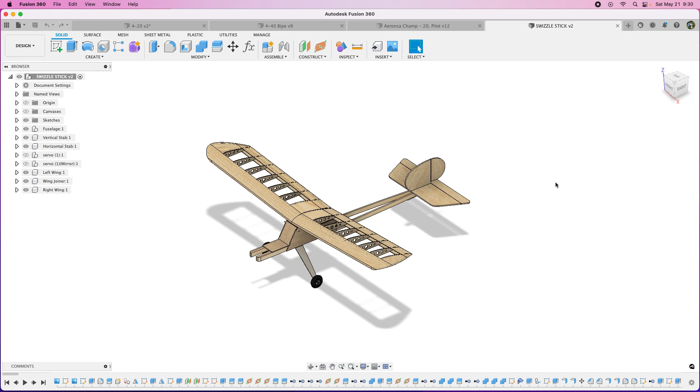I don't know if y'all are familiar, but Balsa USA makes that Stick Plus, and this is based off their plan, which was a Swizzle Stick way back in the 70s. Like the Stick Plus, it's a great flying airplane, but I redrew it. This is the 25-30 size, and I put aluminum gear on it versus the plans called for wire gear. I use a company called SendCutSend to cut my aluminum parts, and they do a fantastic job and are very reasonably priced.

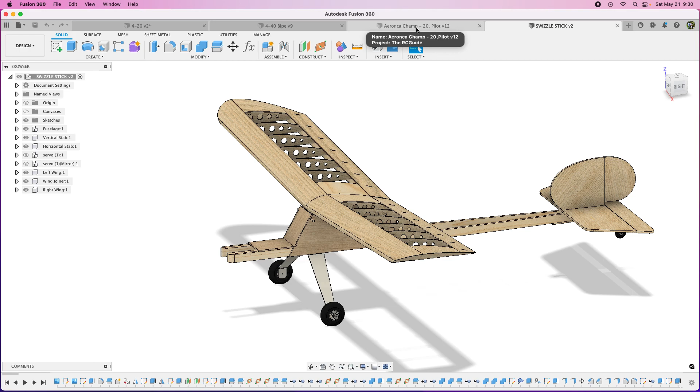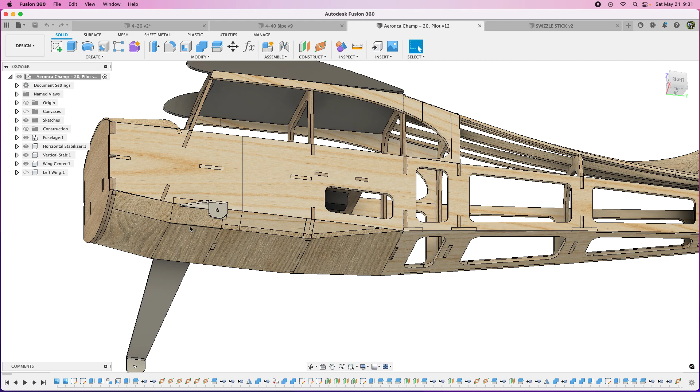This is a Pilot Champ that I've been working on, and this one's been a challenge. A lot of challenges here to overcome, and part of this was I wanted to make a hatch down here to put the battery in, and so that was tricky. And I think these two little spots here, parts here, are going to end up being solid balsa.

We did the stringers here. I'll have a video on that coming out soon. These stringers are not nearly as difficult as you think, and they're easy to do, and of course stringers have a great effect and help you build a lighter structure.

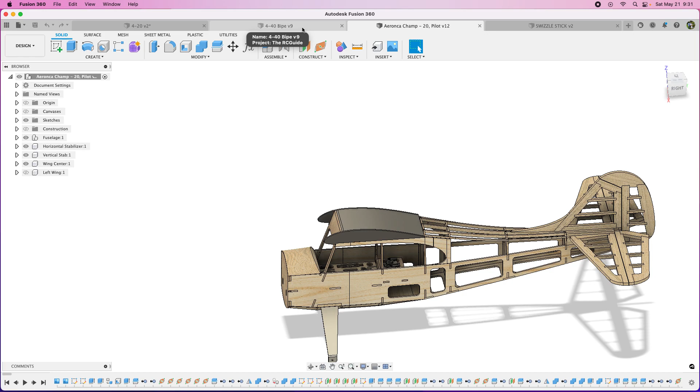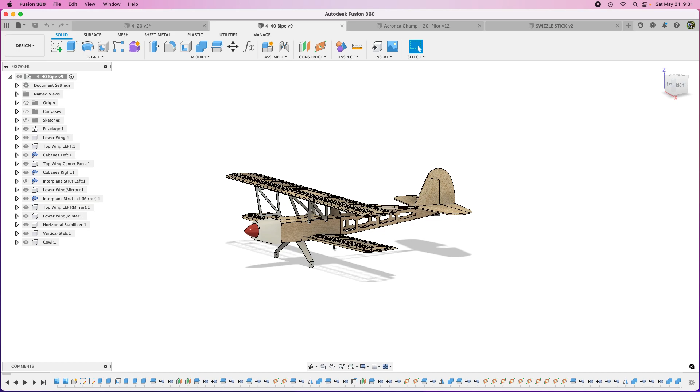This is based off of the Doc Mathews plan 4-40 Bipe, but it was kitted by Ace, and it's very similar to the SIG planes. They don't have the biplane, theirs are more like the Bingo, but still very close. I changed the tail a little bit, I added some rudder. I like to try to fly knife edge when I can, and I took all the dihedral out of the top wing and put less dihedral in the lower wing to help with that.

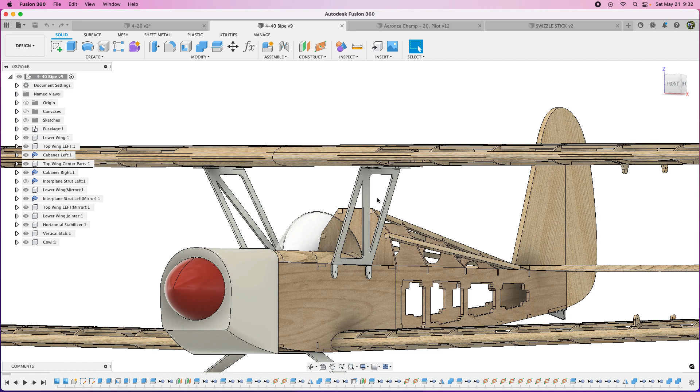The plans originally called for wire cabanes. I drew these in aluminum, and again, I'll send these to SendCutSend, and I'll probably order them out of 5052 because I have interplane struts as well. These will be strong enough, and the 5052 they can bend at SendCutSend. The landing gear I do out of 6061 T6.

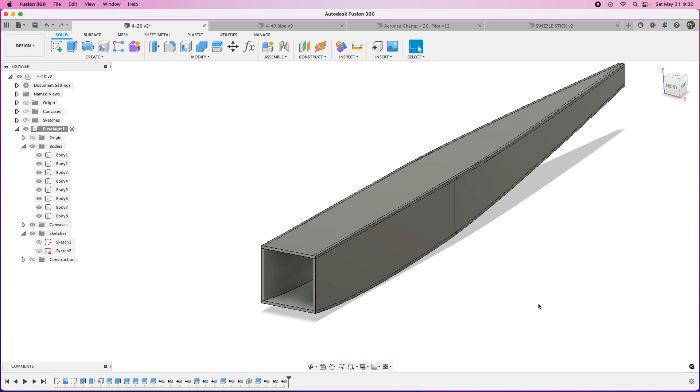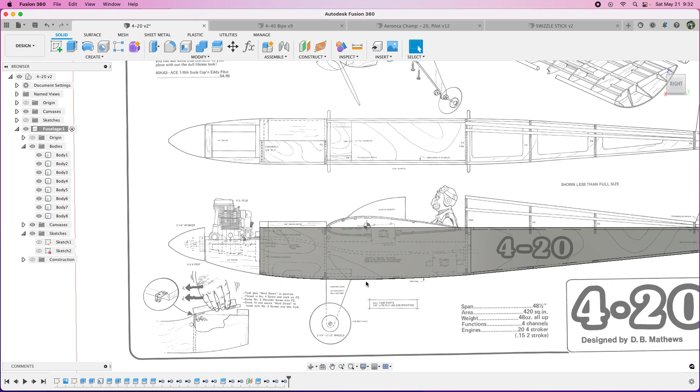Then on this is an Ace 4-40 or 4-20 kit, which is again kind of like the Bingo, but this one had a shoulder wing. It was made for a 20 four stroke, of course I'll probably fly with a 20 or 15 to 22 stroke easy. But I'm going to show how I do landing gear on here. And that way, if anybody wants it, it's hard to find landing gear anyway, but SendCutSend is reasonably priced. And if you send them a lot of projects, it's even better because the price will go down.

All right, I need a sip of the coffee this morning.

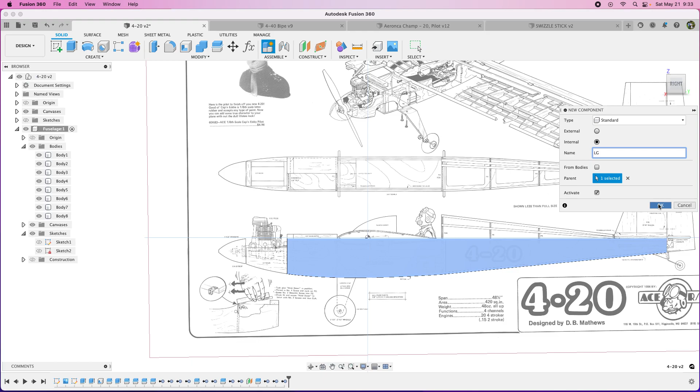So I'm going to go ahead and create a new component here. Normally I do the landing gear way after the phase where I'm at now, but I got up this morning and I said, I think I'm going to make a landing gear video, or at least an aluminum part video. But we're going to call this landing gear or undercarriage for you people in the rest of the world. Yeah, for some reason the US, we call everything and do everything different, and I don't know why.

Okay, so we created a new component for this. I don't know if I have a, yeah, there we go. Nope, not that one. Okay.

One of the things, a quick note about landing gear: if you're doing your own design and you don't know where the landing gear placement should be, it is important depending on the type of gear. So if you look at this, the axle is about at the leading edge on the tail dragger, or conventional gear. If you put it too far forward, it's going to take longer to get off the ground, and it may just hop. Then for tricycle gear, it really doesn't matter where the nose gear is, but it is important where the center of the wheels are on the main gear, and that should be 15 degrees off from the center of gravity.

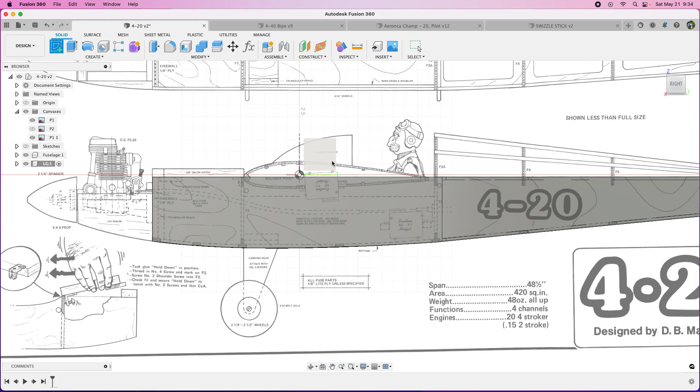So like in this instance, I'll go ahead and just create a little sketch, and I'll show about where it should be. And if we go at the same height that we have here. Of course, the height of your gear is all predicated on what props you're using. You want to make sure you have good ground clearance.

An inch or two is better, or for those using metric, 2.5 to 5 centimeters, or 25 to 50 millimeters. So if I draw a line from here to my center, this should be about 15 degrees back.

So if we go to 90, then we're going to go to 105, which is adding 15 degrees, so about right there. That's where the center of your axle should be on a tricycle gear airplane, right in this spot.

That's a general rule and it does work well. It's far enough back off the center of gravity that you're able to rotate on your takeoff easily. If you go too far back, it's going to take longer to rotate. If you go too far forward, it's going to rotate too soon, and rotating too soon is worse than rotating late. But anyway, you want to avoid that.

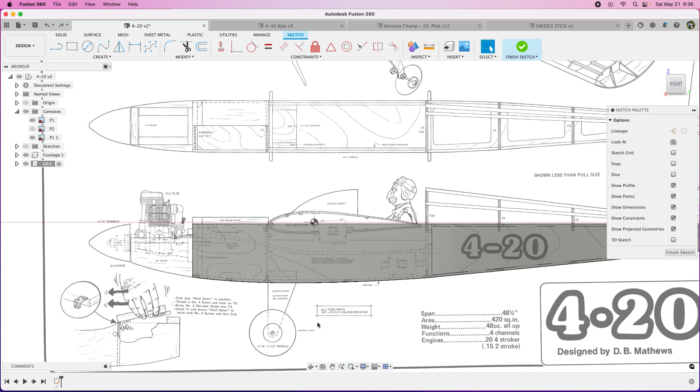Okay, so that's just a quick idea about landing gear placement. Now what I want to do is work this in the sheet metal environment. So I'm going to go to the sheet metal environment, and the first part I make is not in sheet metal.

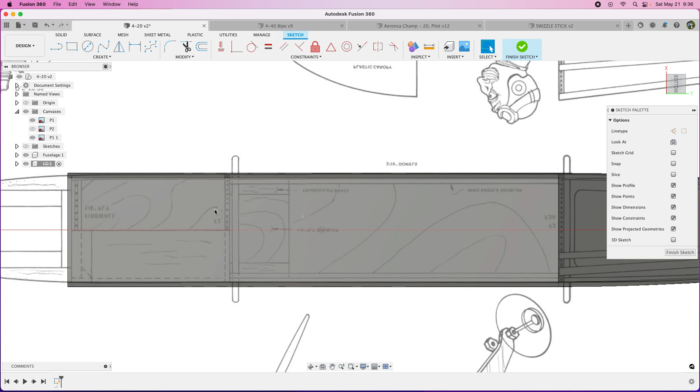So we're going to create a sketch and end up converting it to sheet metal because it's easier to control the thickness. Let's draw a center line here. We're going to make this a construction line just to help us stay located. I'm going to turn that one off for now.

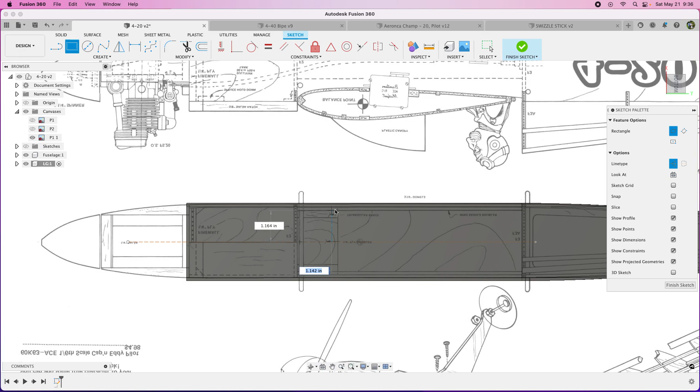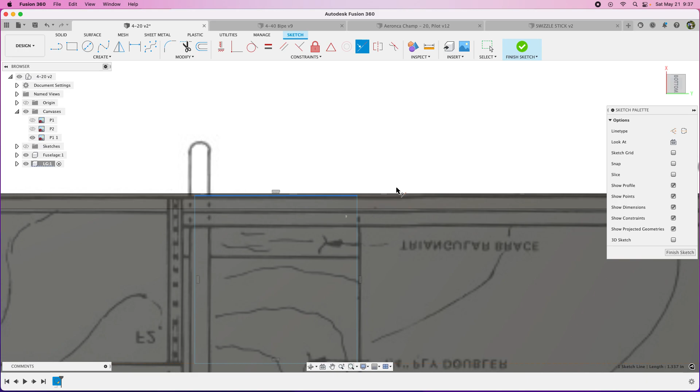This is where the landing gear block is, and I'm not 100% sure of the width, but I only want to go on one side, and then I'm hoping to mirror it. Normally I do it on two sides, but I'm hoping I can just mirror this and combine it to make it easier, with fewer steps. So I'm going to put this in line with that line on the fuselage.

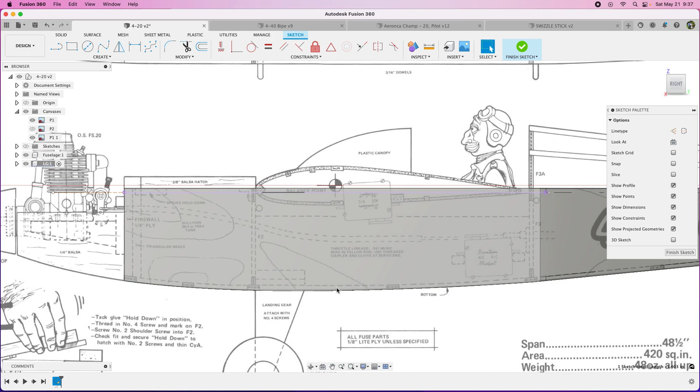Let's look at the side drawing really quick and get this width. Oh, I'm way up there. That's all right. Let's put this—I just want to get that close, and you can make all your adjustments however you want it.

I'm going to do an offset. Since I'm way up here, I'm going to do an offset extrude. That looks pretty close.

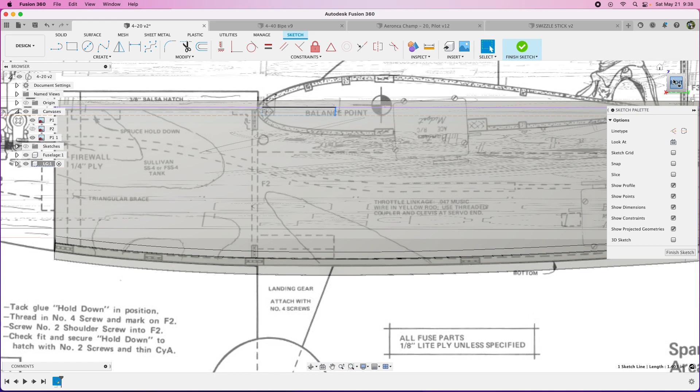Okay, so that's really all I need on this sketch. Let me go back real quick—you really got to define these sketches. So let's put a dimension there, and then we'll put a dimension here, and that should lock all this in place.

For some reason it didn't. That should be the same, right? Yeah, that is. That should be the same.

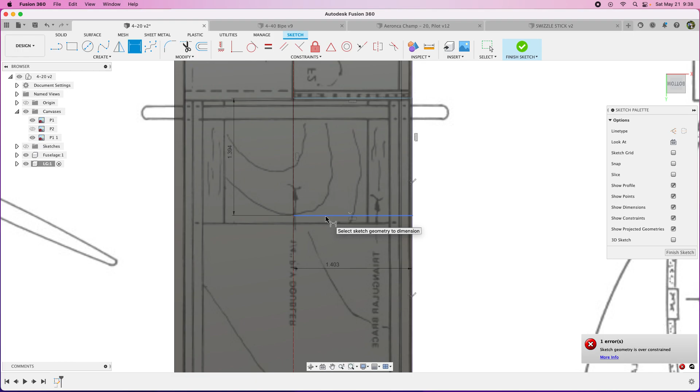Okay, let's find our origin, and then we'll make a measurement from the origin. There we go, now it knows where we are. Okay, so I'll finish this sketch, and let's hit the home button here.

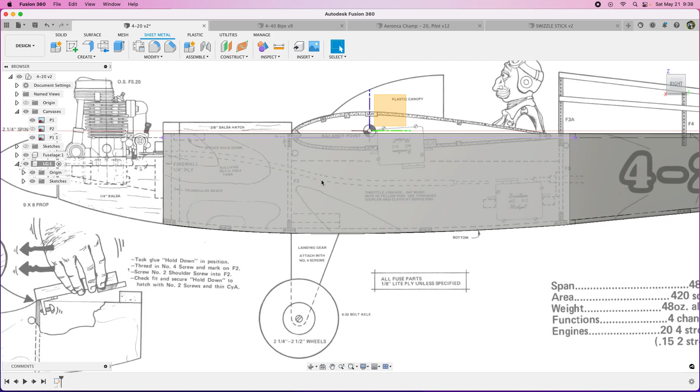What I want to do is make this the thickness of the material I'm going to use, and I'm going to use 1/16 inch 6061 T6. Let me turn the canvases off for now, and I'm going to turn this fuselage off for now. And I'll make sure I get that.

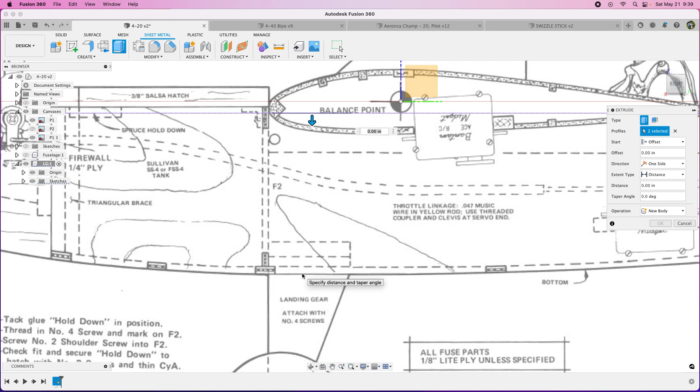And then let's turn these canvases on, and we want to do an offset. So we're going to do this offset, and it wants to know how far—we can do it to an object, which in this case would be easy, but I may not be able to select the object.

Okay, now we want to go down 1/16. Cannot extrude the object—extrusion failed. I don't know what's going on there. Let's see here.

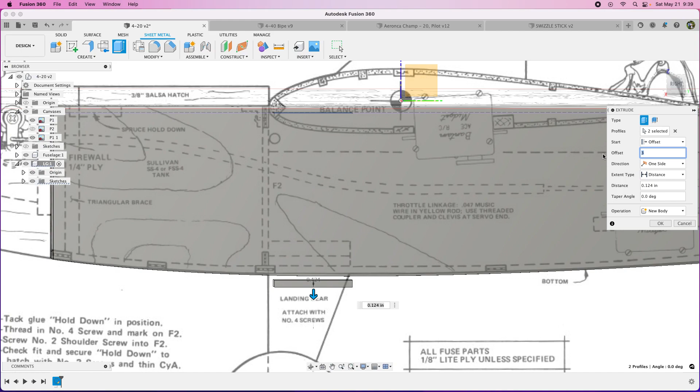I'm going to do a distance. I'm going to guess it's 3 inches, and we can adjust this. I should have measured this before, but that's all right. 2.9... 2.95... all right, that's 2.93. There we go, that's pretty close.

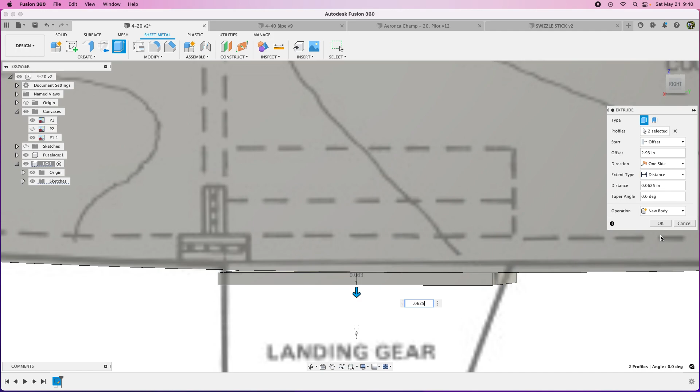And then we want the distance to be a 16th, so 0.0625, or 1.5 millimeters, or 1.6 millimeters to be closer to accurate for the rest of the world. And there we have our little base to our landing gear.

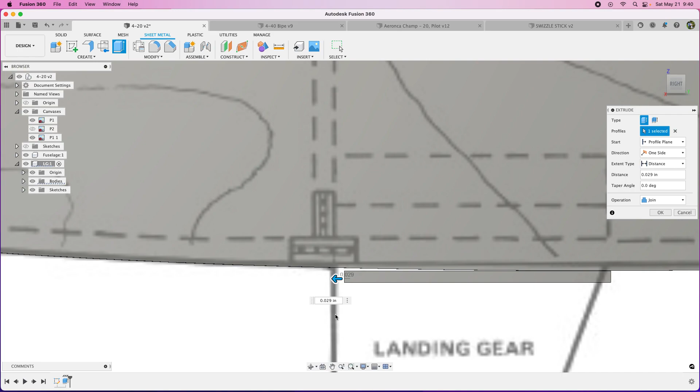It looks like it's a little short from what was on the plan, but that's fine, we can fix that. We're going to extrude this side. And of course, you can measure more accurately from the beginning, and that's fine. All right, I think that's going to work.

Okay, so now we want to convert this part. Let me change the appearance on this fuselage so it's easier to see. You can hit A for appearance, or you can right-click.

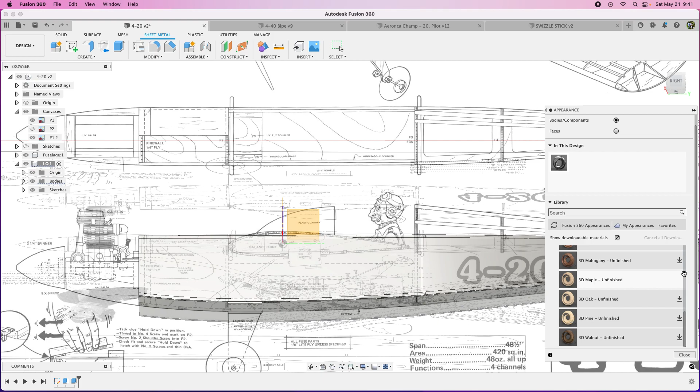Let's go here—wood solid, unfinished. And we'll download this one. That's how you download them if you don't have them already downloaded to your computer. Let me just go up here.

In case y'all were wondering how that happens, this is how you change your colors and appearances. Just so you know, you can change the appearance, but that doesn't change the actual material you're using. I'll show later in another video how to do that.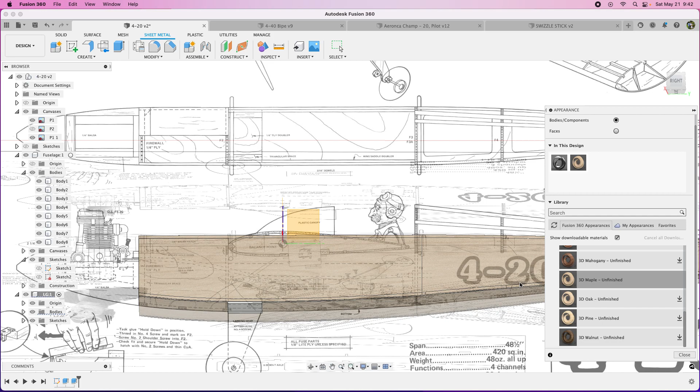I might be able to just hit... there we go, that did the whole thing. Okay, so let's close that.

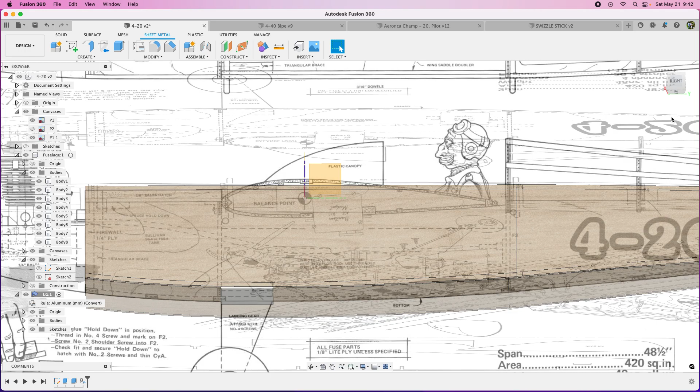Now we're going to convert this piece to sheet metal, and I'm going to change it to aluminum so it has the aluminum K factors. It says note: wall thickness will be changed to 0.063, which is what we want. And there we go. The sheet metal tools in Fusion are really nice and simple to use.

One of the things on this plan is it doesn't give me an accurate dimension of the width of the gear. So just so you know, as a reference, the landing gear width is about 25% of the wing. I'm going to run over to Chrome, and it's 48, so 12 inches is about the width.

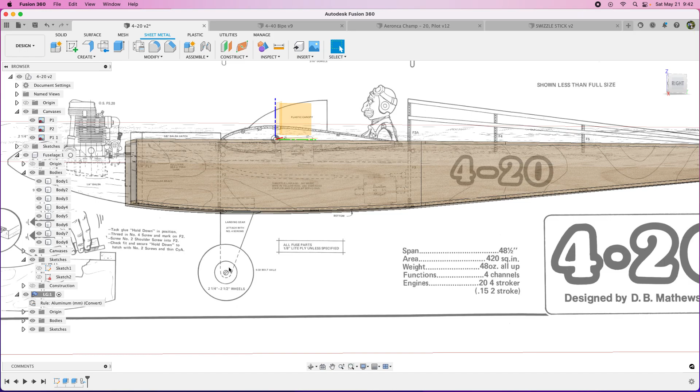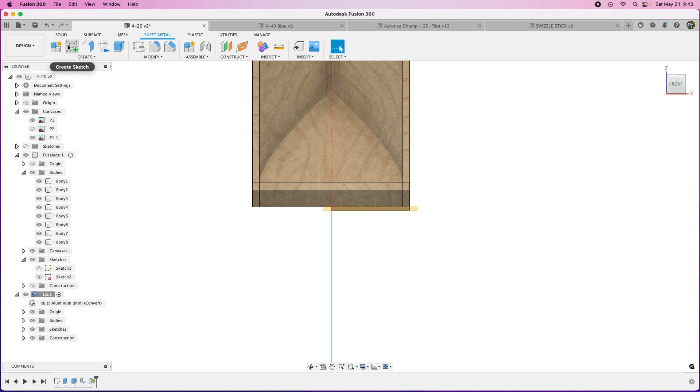What I'm going to do is make a sketch to help guide me through that. I'm going to create an offset plane—not there, on this face. And we're going to create a sketch on there. This is just going to give me some guidelines when I do my bends to help me out.

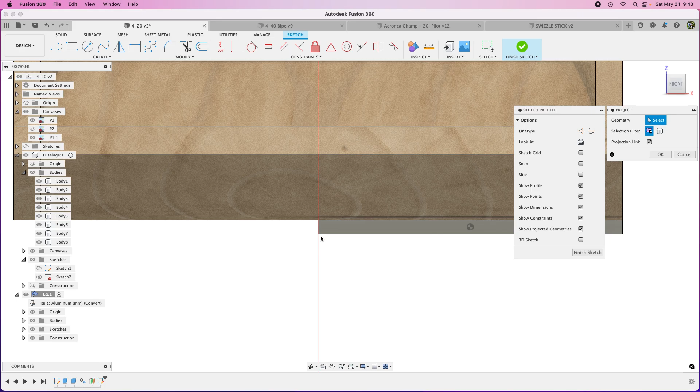I don't know why Fusion does this weird thing with moving the center. I'm not sure why it does that, but I'm just going to project this point. All we're going to do here is guidelines. I'm going to bring that down and come over here and see where the center of the axle is. It looks like it's about right there.

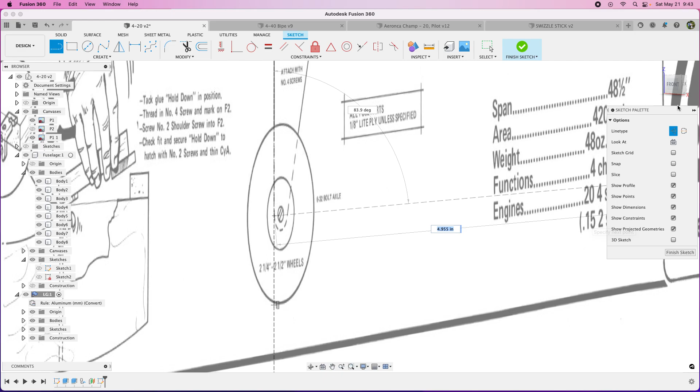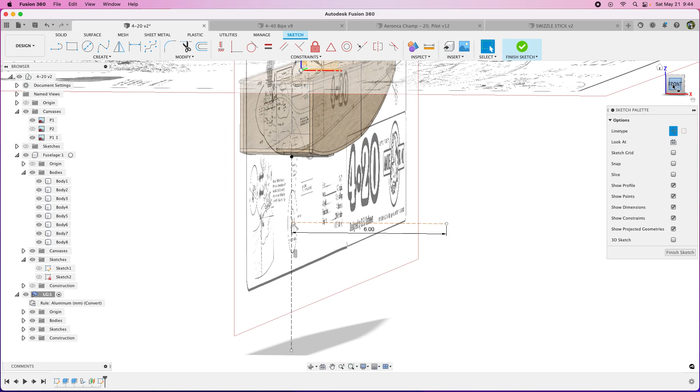We want that to be 90 degrees, and this has to be 6 inches wide. You can go one way or the other with that, but the wider stance, of course, is going to be a little more stable. But if you go too wide, it's going to be harder to turn. So finding that balance—this is where the center of my axle needs to be, and the center of my tread. So my gear should come about right here, a little far back or whatever.

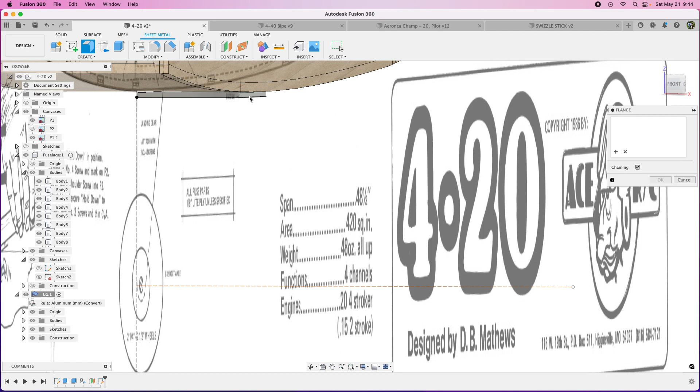All right, so that's going to be our guide. I'm going to come up here and create a flange, and I'm going to select this edge. As you see, it automatically creates the bend with the bend radius because we selected aluminum.

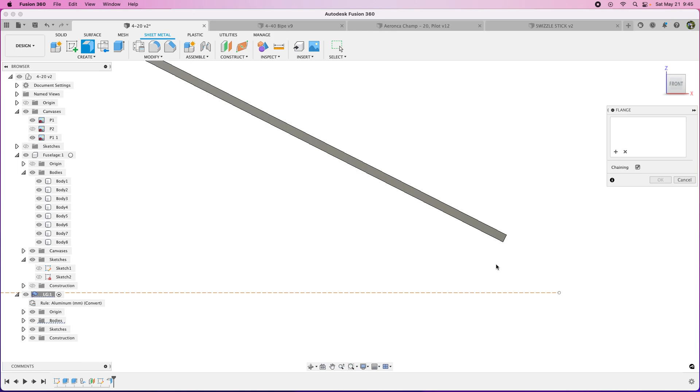And then we're just going to change this angle and see where that takes us. We're going to need a little less. 30 looks pretty good. And on this gear...

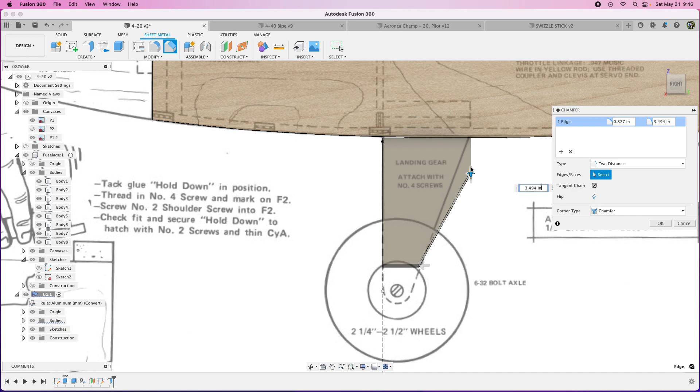I'm probably going to use an inch, so I want a half inch to be dead center. I'm going to use an inch on this last flange. So let's go up a little bit more. You can turn the snap to grid off.

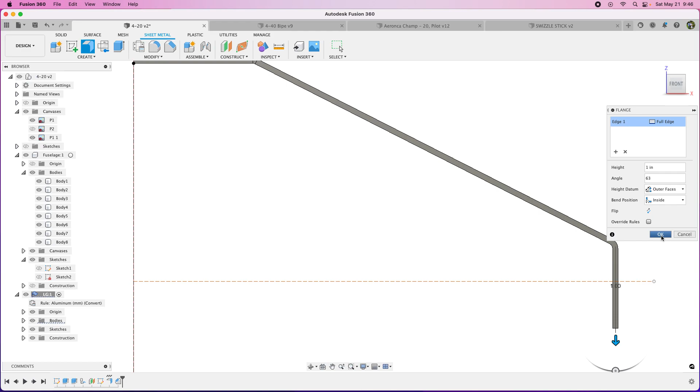Layout grid locked—I don't know why I'm snapping, but anyway, let's go 25 degrees and see where that takes us. It's probably 27, let's try that—that's a little better. And you can always come back and adjust it. So, 27 degrees.

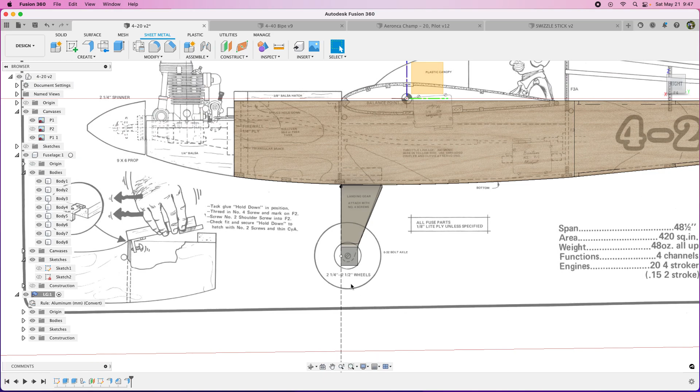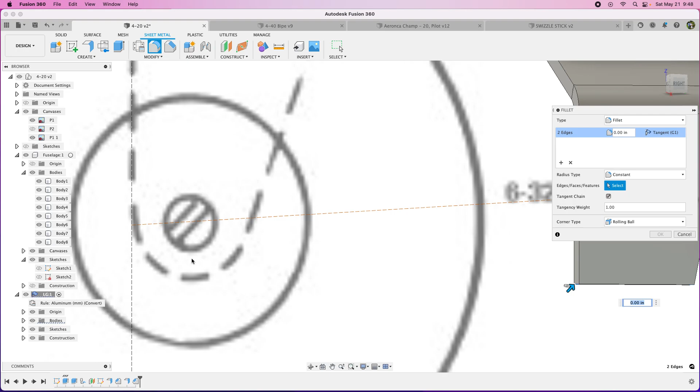Since there's a chamfer on this part, I'm going to hit chamfer, and I'll use two distances. You can do distance and angle if you know that angle, but I don't, so I'm just going to do two distances and put that there. It will warn you when you get too close to that curve or bend, because it won't take the chamfer into the bend. But it's going to get us pretty close like that, so we'll say okay.

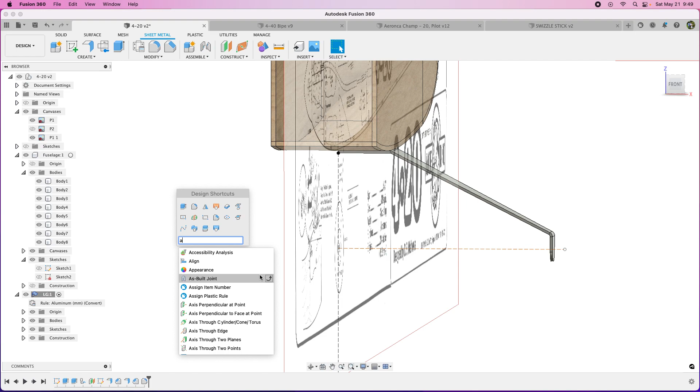So now when we make this next flange, it's going to be that width. I want to make this 1 inch, and then we've got to change this. To get 90 degrees, we need to subtract 27 from 90, so that's 63—is that right? Yeah. And there we go, that's pretty close.

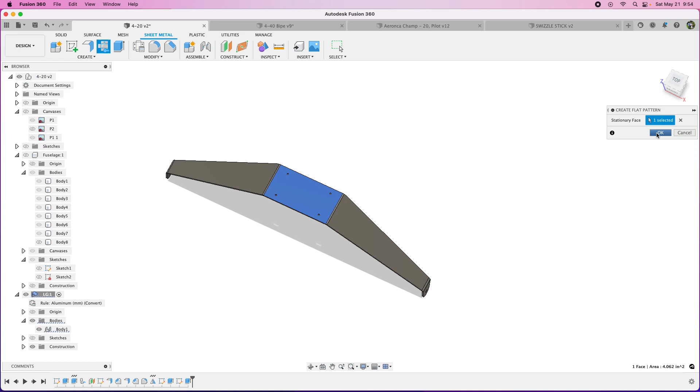I may actually change this to 3/4 of an inch, and that should work. I probably need this a little bit longer, so I'm going to go back here and edit this flange—edit feature—and just make this a tad longer.

And we'll see where that ends up. That's pretty good, because we got the width of our wheel and everything. So there's one of the legs of our gear. And that's pretty close to center.

And we can come in here and put a chamfer here. Then it has a radius over the bolt hole. You don't have to follow these, but I do like to put fillets down here just to help keep the gear from catching the grass. That looks good, you can go all the way up to the top, right to that bend. Then come in here and get the fillet tool.

And select that. Select that edge, and let's make this round. And that's probably good. I want to keep this a little bit longer than what they had on the plans.

All right, so there you have it. That is one side of our landing gear. Now what I want to do is mirror this. Again, I talked about this - you can hit S on your keyboard, and then you can search in this little box. You can go to mirror, and then I have an X here because I added it to my design shortcuts.